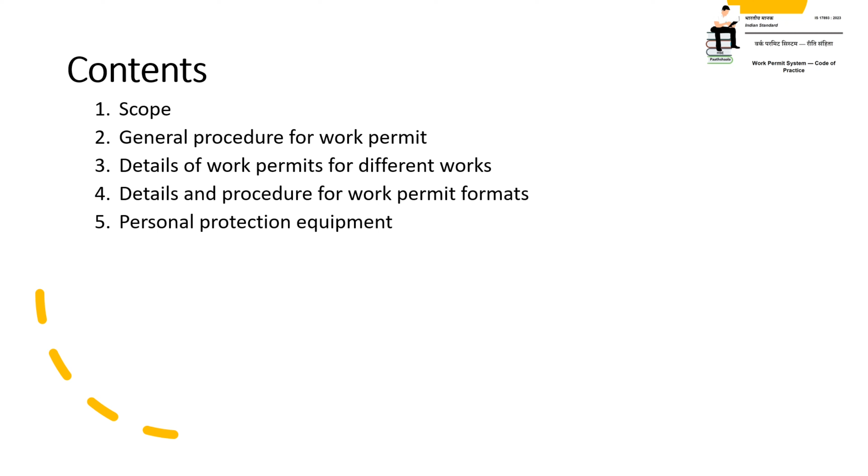Following are the contents in this code: scope, general procedure for work permit, details of work permits for different works, details and procedure for work permit formats, personal protection equipment, gas test, approvals, interplant clearances, revalidation and renewals, closure and cancellation, audits, responsibility, and annexures such as permit templates and instructions.

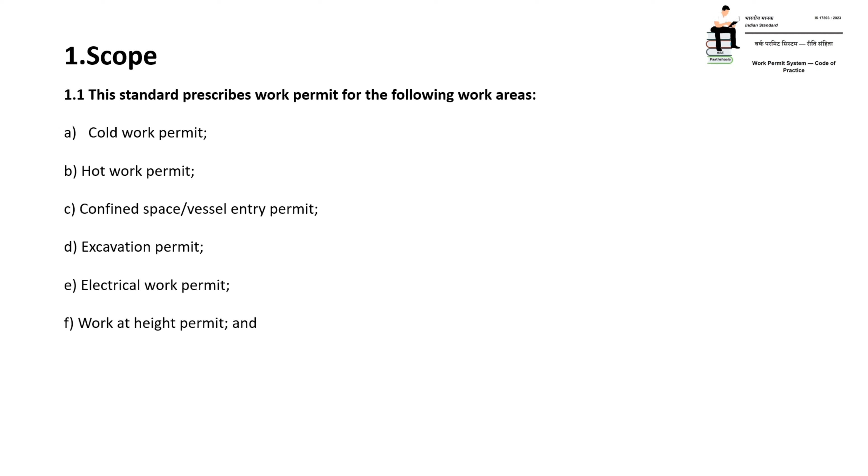This standard prescribes work permits for the following work areas, meaning the different types of work and work permits: cold work permit, hot work permit, confined space vessel entry permit, excavation permit, electrical work permit, work at height permit, and radiography.

Work permit may not be applicable for the following activities: routine welding, cutting, and similar maintenance jobs carried out inside designated central workshops or demarcated areas; routine sampling for the purpose of laboratory analysis; canteen for cooking, preparing tea, food, etc.

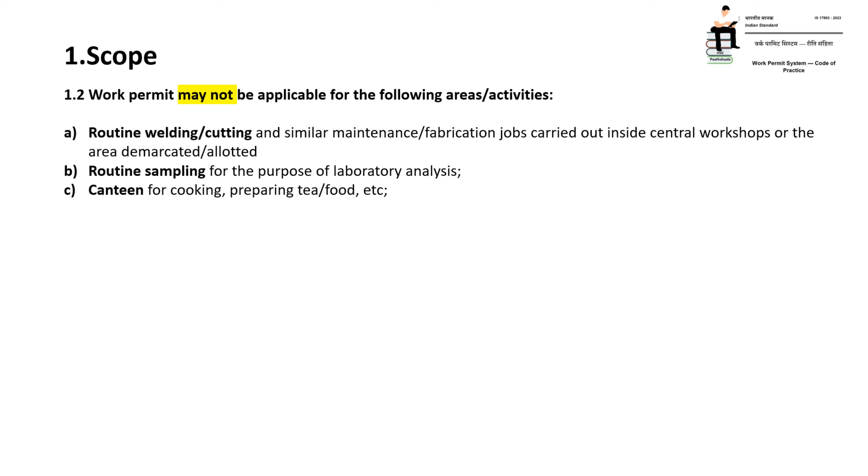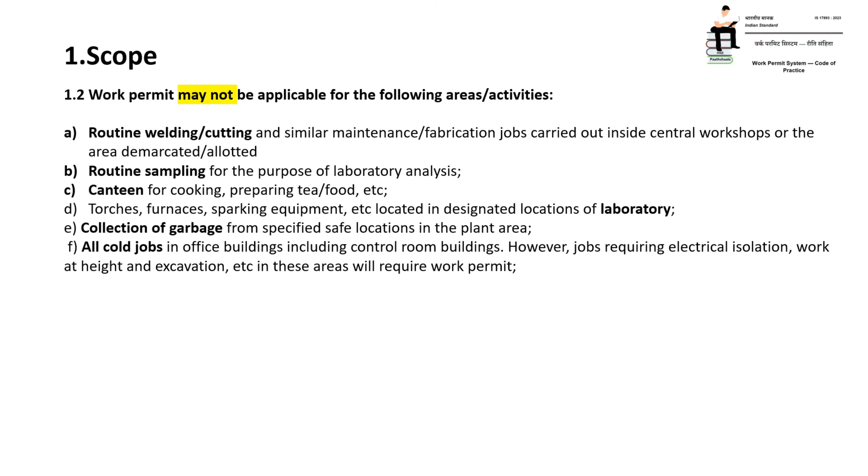Torches, furnaces, sparking equipment, etc. in designated locations of the laboratory; collection of waste and garbage from specified locations; all cold jobs in office buildings, including control room buildings. However, jobs requiring electrical isolation, work at height, and excavation, etc. will require a work permit.

Visual inspection by maintenance or inspection personnel of rotary or static equipment. Replacement of tube light rod inside a building. Verbal permission from the shift in charge or area in charge is to be obtained.

Replacement of bulb on poles inside plant areas and on road requires a work permit. Gardening related jobs like grass cutting, hand cutter, branch trimming and cutting, etc. around office and room buildings, plant areas, and non-plant areas.

However, for jobs requiring electrical connections like lawn mowers, mechanized hacksaw machines, and work at height like climbing on a tree, and excavation more than 30 centimeters deep, respective work permits will be required.

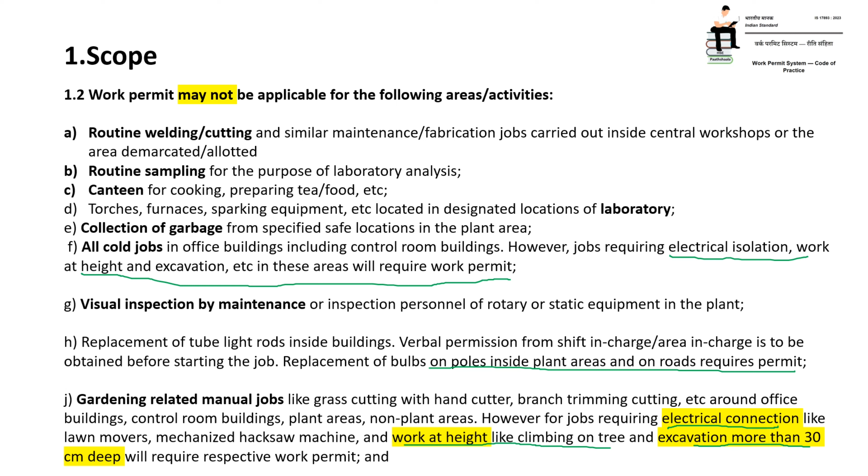General procedure for work permit. A work permit is to be made in triplicate.

It means 3 copies. The first copy is for the executor who is going to do the job, and the acceptor shall display his copy at the job location to make the area personnel aware of the job.

The second copy is for the issuer. He retains this copy for control of work activity. The third copy is for the safety department.

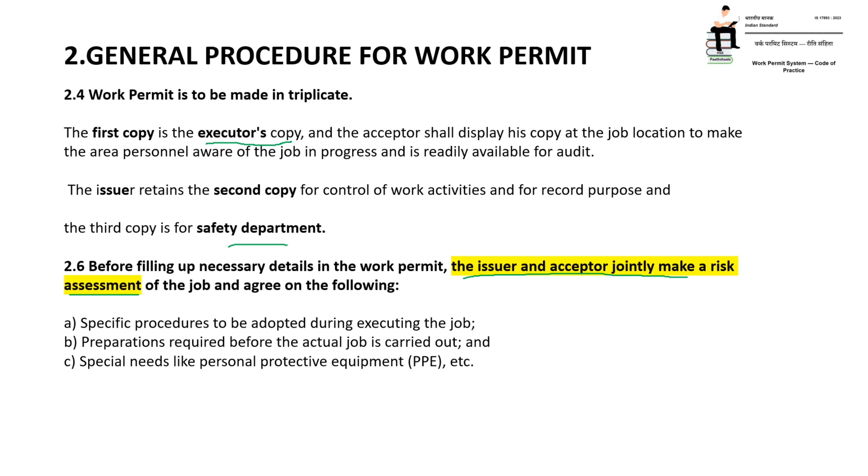Before filling up the necessary details in the work permit, the issuer and acceptor jointly make a risk assessment of the job and agree on the following: specific procedures to be adopted during execution, preparations required before the actual job is carried out, and special needs like personal protective equipment, etc.

Cold work permit is for an activity which is not likely to produce sufficient heat capable of igniting flammable gases. Examples include erection and removal of scaffolding, and insulation of equipment and pipelines.

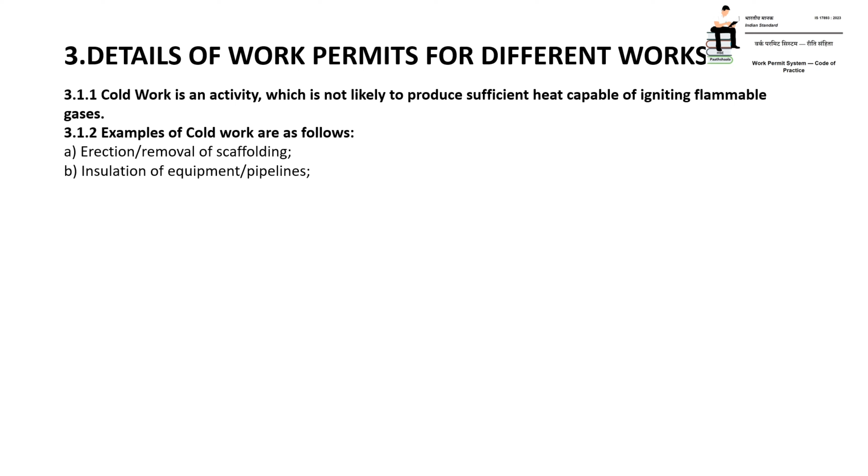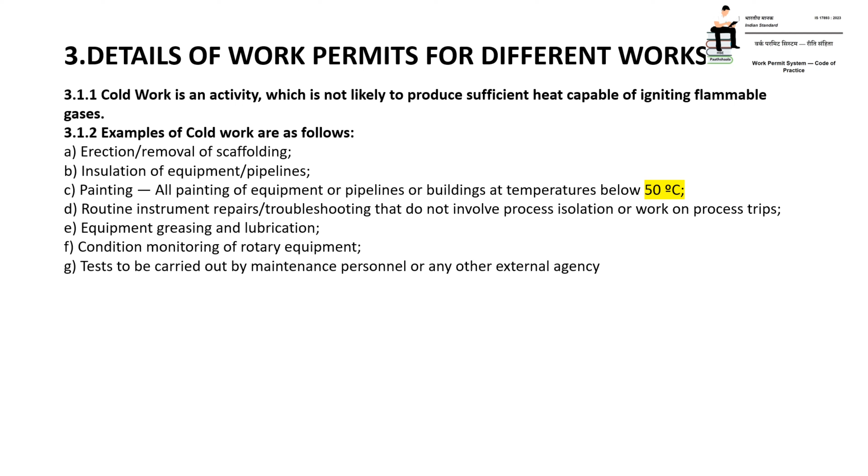Hot work on equipment like DCS panels and UPS inverters; excavation, digging, road cutting, removal, soil chipping, and grading to a depth less than 30 centimeters deep, either using mechanical equipment or manually.

Work at height at or above 1.8 meters above ground level, where a permanent platform and guard railing is not available. Hydrojetting, online sealing, sandblasting, and use of portable electrical tools and appliances in areas other than plant operating areas.

Use of vacuum cleaners and other gadgets requiring power supply. All inspection and test work performed by employees other than those assigned to operate the equipment.

Hot work is any type of work which produces heat or spark capable of igniting any flammable or combustible gases. Examples of hot work are as follows: welding, grinding, burning, soldering, brazing, blasting, gas cutting, chipping by spark producing tools.

Open flames, hexa cutting on equipment, line or vessel of hydrocarbon services, any equipment, line or vessel which contained any explosive, corrosive or toxic material, use of non-flame proof electrical equipment like cameras, mobile phones, non-intrinsically safe radio pagers, etc. Online leak sealing in pipelines and equipment, hot tapping involving welding and drilling in pipelines, and pressure spray painting.

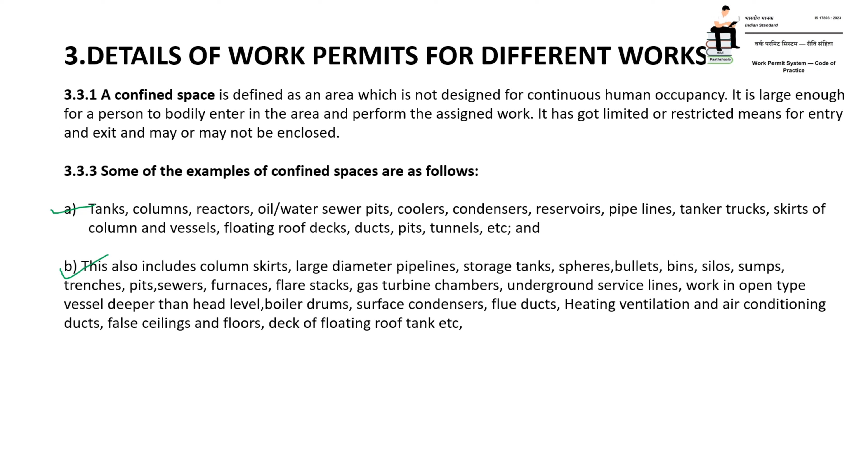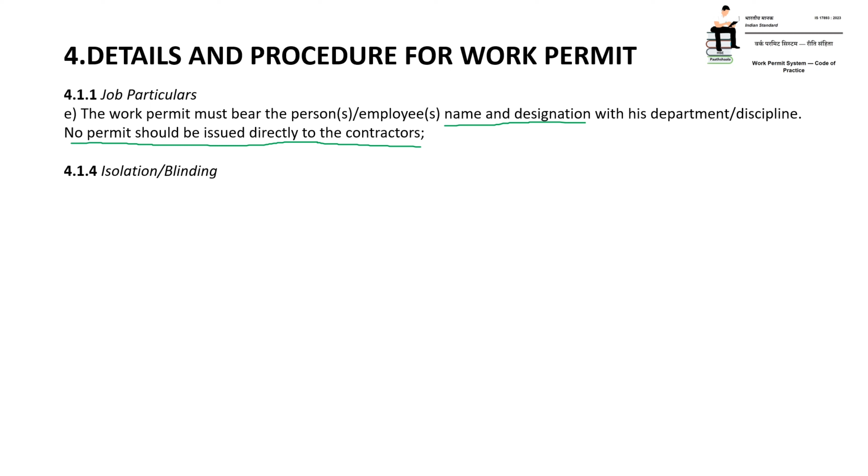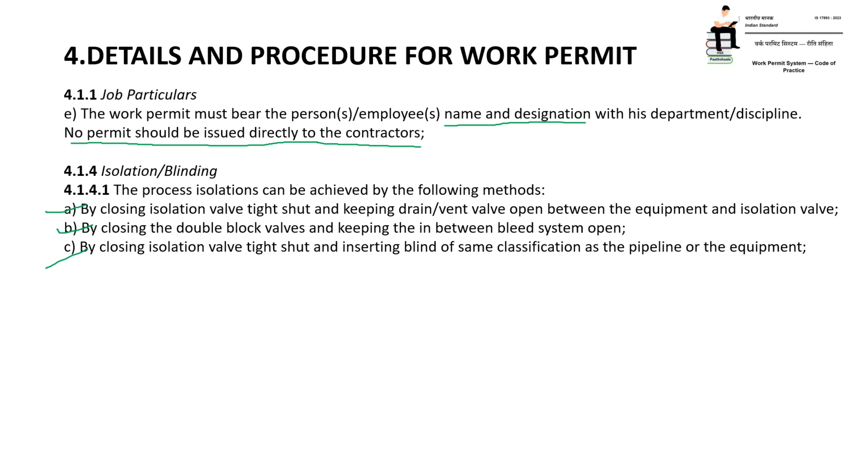These are the different means of isolation. By closing isolation valve tightly shut and keeping drain vent valve open. By closing the double block valves and keeping the bleed system in between open. By closing isolation valves tight shut and inserting blinds of same classification. By physical disconnection of pipes. By closing the MOV, motor operated valve.

Point to be noted: isolation methods item A and B, by closing isolation valve tight or by closing the double block valves, are not reliable and should not be adopted for jobs involving hot work, entry into confined space, and for the services of hazardous chemicals.

Use of non-sparking tools is required to be ensured for the job on equipment or piping used for hydrocarbon service till it is totally decontaminated.

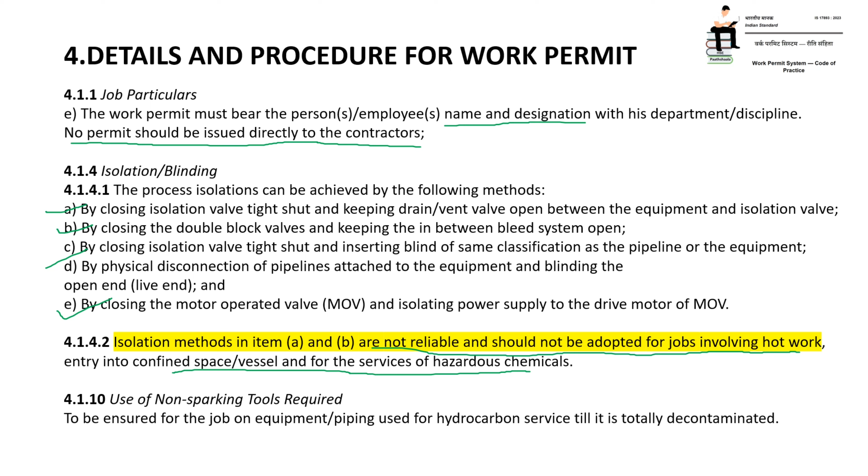Persons are expected to use cotton hand gloves during any work activity for protection of hands from minor injuries. Safety belt with lifeline is a fall-arrest device. Only full body safety harness with double lifelines is to be used. It is to be specified in case persons are required to work at a height of 1.8 meters or above, on an unprotected surface, structure or fragile roof.

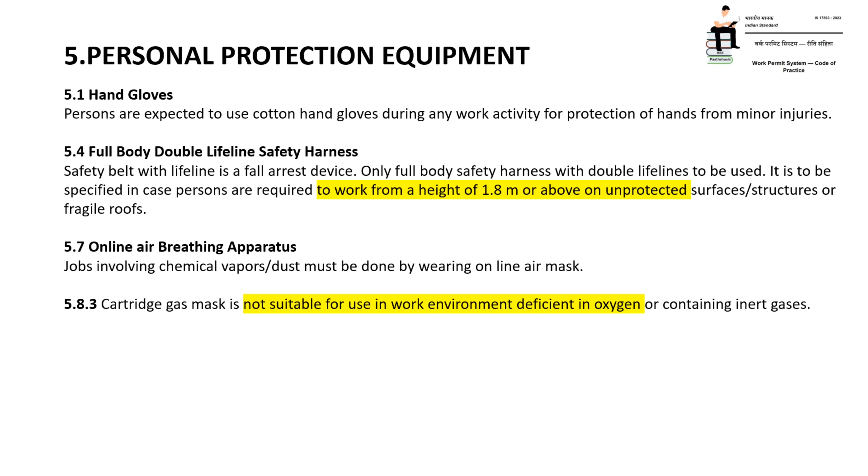Jobs involving chemical vapor dust must be done by wearing an online air mask. Cartridge gas mask is not suitable for use in a work environment deficient in oxygen or containing inert gases.

Gas test for oxygen content, hydrocarbon content, and toxic content, if vessel or tank used for chemicals toxic in nature, are to be carried out by the permit issuer for carrying out jobs. The name and time of person carrying out the test shall be mentioned in the respective permit. It is proposed to carry out gas test for hydrocarbon content within a 5-meter radius of the work location.

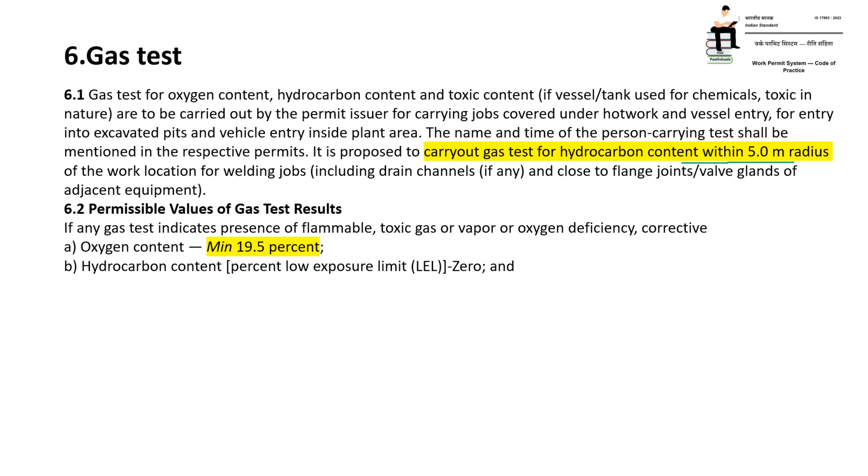For welding jobs, including drain channels and close to flange joints, valve glands of adjacent equipment. Permissible values of gas test result: if any gas test indicates presence of flammable, toxic or vapor or oxygen deficiency - oxygen content minimum 19.5%, hydrocarbon content percent low exposure limit (LEL) 0%, toxic content below TLV, that is threshold limit value.

Reporting of gas test result: the gas test should be done prior to issuance of work permit to the acceptor and be repeated just prior to starting of hot work. The result should be reported by plant personnel authorized by plant HOD or area in charge.

As per work condition and the type of work being carried out, it is necessary to do the gas test at regular intervals. The issuer decides the frequency of testing and the type of gases to be tested.

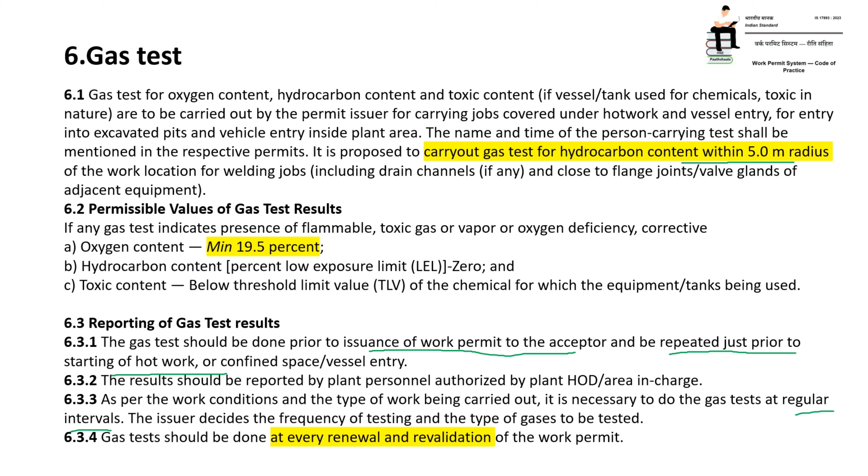Approvals: in operating plant areas, the shift in charge shall issue the permit for the area under his jurisdiction. For the jobs on pipelines, the product utility supplier shall initiate the permit if the work is to be carried out up to the battery limit of the receiving plant.

Battery limit means the boundary limit of the plant. Inside the battery limit, that is the boundary limit, the receiving plant shall issue permit after confirming due safety precautions at supplier's end. The issuer is an employee of the company. No person can issue a work permit to himself. That point is to be noted.

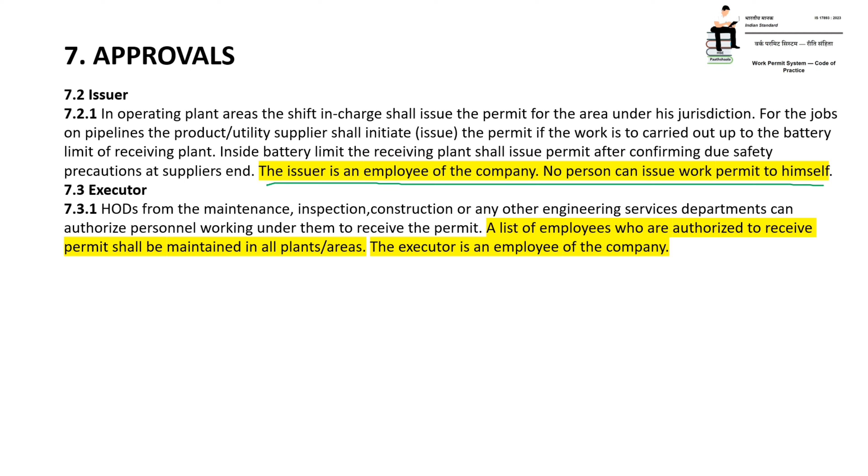HODs from the maintenance, inspection, construction, or any other engineering service departments can authorize personnel working under them to receive the permit. A list of employees who are authorized to receive permits shall be maintained in all areas. The executor is an employee of the company.

Prior to issue of work permit, the issuer and executor shall jointly inspect the job location and identify the requirement of job preparation and special PPE required for safe execution of the job.

The responsibility for safe execution of the job lies with the acceptor of the permit. He ensures that the precautions and PPE stipulated in the permit are complied with and safe procedures are followed.

A toolbox talk has to be conducted by the acceptor to the contract workers prior to start of the job. The safety talk should emphasize the proper procedure for carrying out the job, identify any hazards involved and the precautions to be taken. Plant area in charge.

For hot work and confined space permit, excavation permit, authorization of plant area in charge is required. Employees working above the level of shift in charge in the plant, non-plant areas and authorized by the plant HOD will sign as plant area in charge. HOD himself can sign as plant area in charge for authorizing these permits.

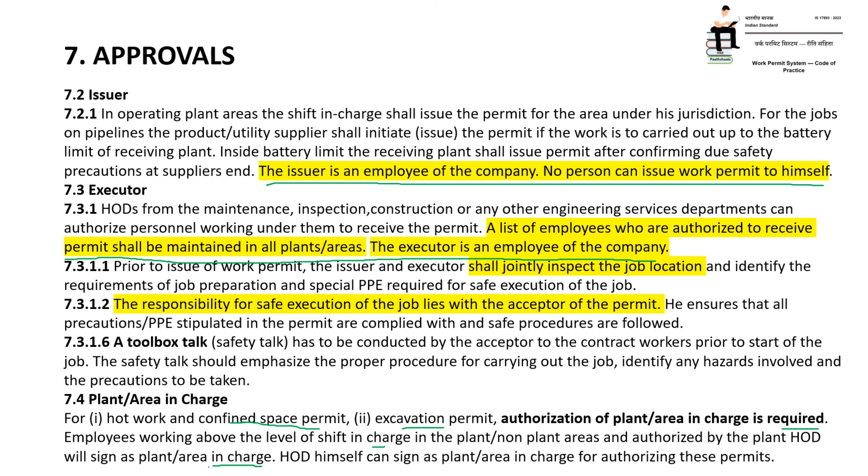Revalidation and renewals. Validity of work permit. Permit shall be issued by initiator for period till end of the shift only. In case the job is not taken up or not completed within the shift of issue of permit, the permit must be renewed by endorsement of incoming shift in charge by incorporating and ensuring necessary changes to safety requirements.

The executor shall sign and forward it to the issuing authority for extension of work permit. All signing authority must sign the permit for extension of the permit. Validity of work permit for cold work, hot work, vessel entry permit and excavation shall be for 7 days.

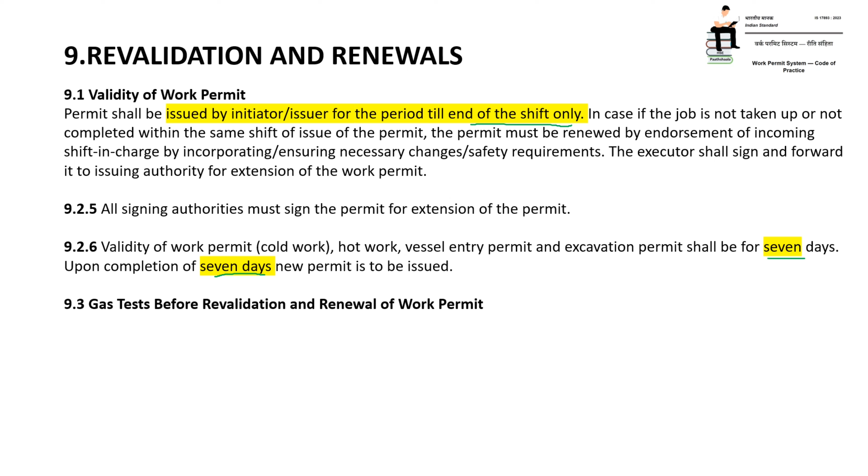Upon completion of 7 days, new permit is to be issued. Gas test before revalidation and renewal of work permit. Necessary gas test should be carried out at the time of revalidation, renewal of

Closure and cancellation. Closure of work permit. The permit can be extended for a total of 7 calendar days maximum. For work extending beyond 7 days, a new work permit has to be issued after closing the present work permit.

Also, if there is a break in the work for more than 1 calendar day, a new permit has to be issued. All signing authorities for approval must sign the permit for closure of the work permit.

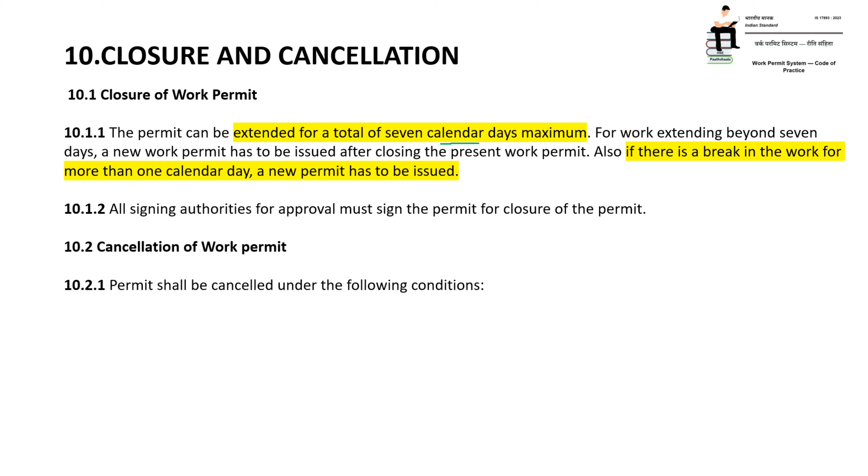Cancellation of work permit. Permit shall be cancelled under following conditions: declaration of plant site emergency situation, any incident area, audits.

Auditors authorized by plant HOD or HOD safety will audit the work permits. A detailed audit checklist will be developed for the use by the HOD safety.

HOD safety shall arrange to train and validate all employees involved in the signing of work permit procedure. The list of such people authorized to sign in the work permit should, however, be prepared by the individual plant HODs and area in charge.

The final authorization shall be done by the respective plant HODs area in charge as per format attached. HOD safety shall also arrange to provide trainings and validating people identified as auditors of these procedures.

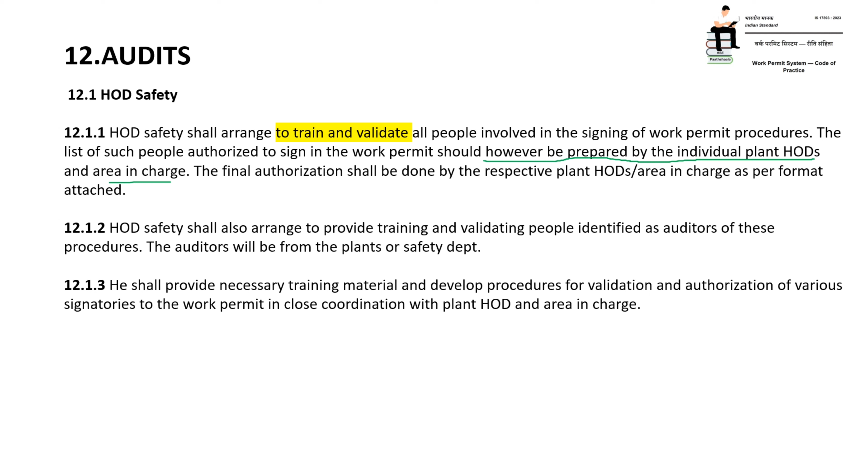He shall provide necessary training materials and develop procedures for validation and authorization of various signatories to the work permit. He is also responsible for periodic review and updating of work permit procedures.

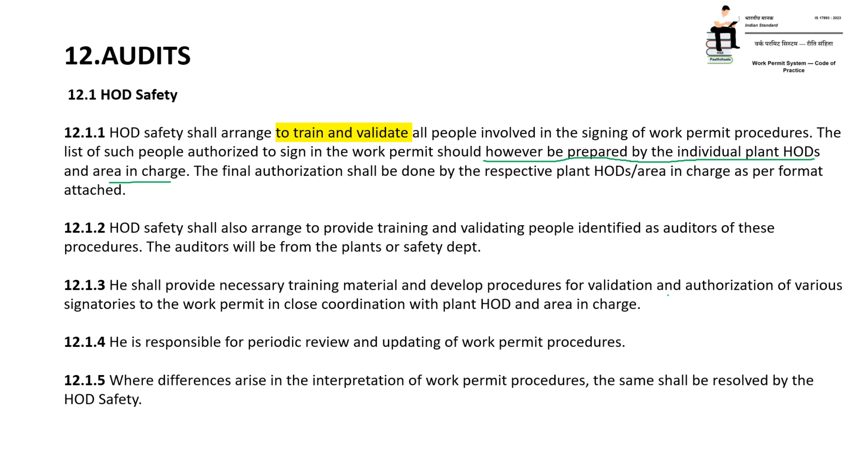Where differences arise in the interpretation of work permit procedure, the same shall be resolved by the HOD safety. The original acceptor copy of all closed permits shall be kept by the issuer for a period of at least 30 days from the closure of permits.

At the end, you will find the annexures of all the work permits. These are the formats or templates which you can directly adopt. And after each annexure, you will also find the work instructions and do's and don'ts for the particular work permit.

As an example, you see this is the cold work permit. Do's and don'ts for cold work permit. Like A.7.1 do's and then don'ts.

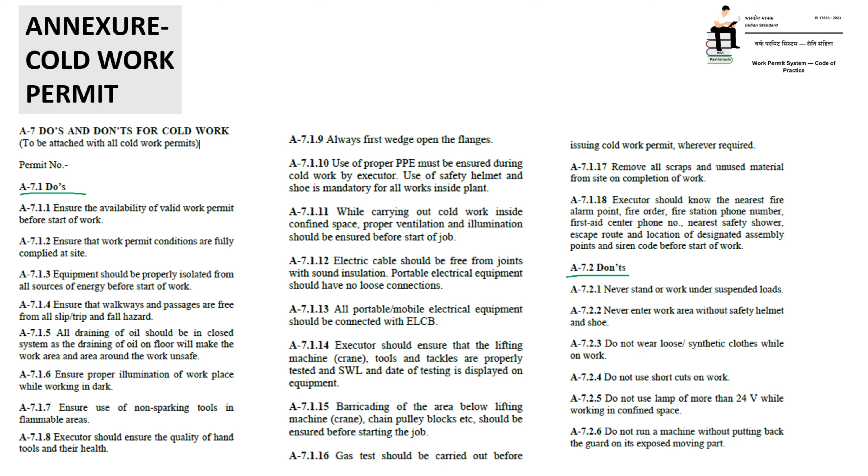A7.2. This information is quite helpful while conducting the toolbox talk, and also you can include this information at the back end of the work permit.

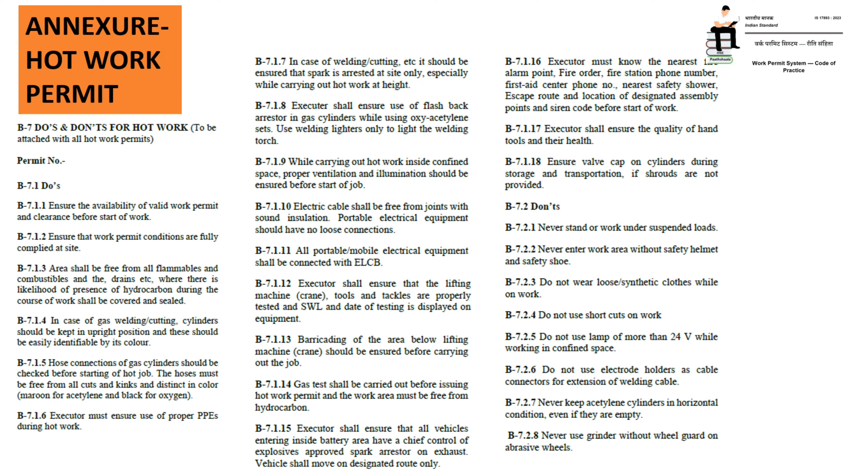For another work permit, that is hot work permit, this is the template. You will find do's and don'ts for hot work permit. For confined work permit, work...